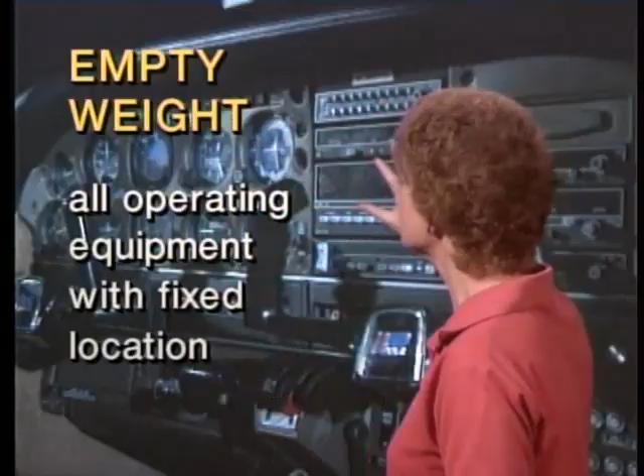The empty weight, the operating weight of the aircraft, includes all operating equipment that has a fixed location in the aircraft and is actually installed. That includes the radio equipment, the avionics, instruments—anything that has a fixed location in the aircraft and is actually installed in it is included in the empty weight of an aircraft.

Now, is fuel included in the empty weight? Only the fuel that you cannot get out of the aircraft, and that is called unusable fuel. The unusable fuel is included in the empty weight simply because you don't have any choice. When you drain the fuel out of the aircraft to weigh it, you can't get that fuel out. It's the fuel in the lines and in certain parts of the tanks where it just won't drain, so that will be included in the empty weight of the aircraft.

Now, is oil included in the empty weight of the aircraft? It depends on when the aircraft was certificated, but the FAA wants you to know that aircraft certificated under current airworthiness standards, FAR 23, do have the oil included as part of the empty weight. That became effective March 1st of 1978. So any aircraft certificated under the current standards do include the oil as part of the empty weight, and you don't have to account for it separately.

Now, the useful load on an aircraft consists of the crew, the fuel, the passengers, and the cargo. The stuff that you, as the pilot, could load on and go somewhere with—passengers and cargo, yourself as the crew, and the fuel you would put on to help you get there. So useful load is crew, fuel, passengers, and cargo.

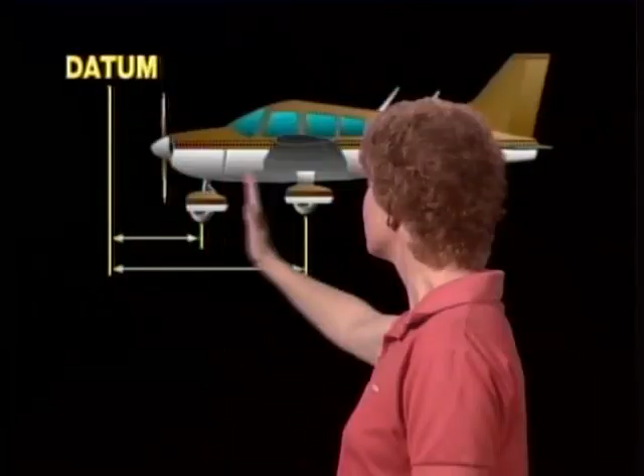The datum line is usually placed in front of the nose, although not always, and the reason is that all the measurements will be positive numbers, which contributes to accuracy. If you had the datum line at the firewall, say, then all the items in front of the datum line would be minus numbers, and you'd have positive numbers to the rear, which would make the calculations more confusing. So by putting the datum line in front of the nose, all these arms will be positive numbers, which helps keep things straighter.

The arm is the horizontal distance that an item is located from the datum line, and usually it will be aft of the datum. If the datum is up in front of the nose, it certainly will be - but it's whatever distance an object is from the datum on the aircraft. The arm's distance is always measured in inches, not feet or anything like that. It's always given in inches.

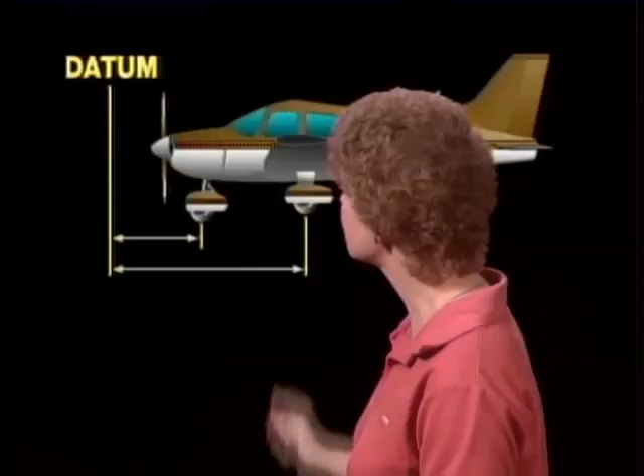Sometimes when working with aircraft information, you'll see the term fuselage station numbers. This identifies the arm distance from the datum, or sometimes from some other point chosen by the manufacturer to measure from. Fuselage station numbers are often used when the manufacturer is identifying the location of parts in the aircraft, to tell you where to find different parts. When working with actual weight and balance, we usually use the term arm for the distance aft of the datum, but when locating parts, you'll very commonly see the term fuselage station number.

Okay, we know the weight of an item, we know its location, the arm, the distance aft of the datum. If you multiply the weight times the arm, what you get is the moment. The moment is basically the leverage effect, the force applied at that particular location, which depends on the weight located there and the arm, the distance from the datum point. If you're given any two of these items - weight, arm, or moment - you can always find the other. Weight times arm equals moment, but you can take the moment and divide it by either the weight or the arm to get the other information.

For example, the FAA may say to you on your mechanics test: you've got a 40-pound generator, and it's applying plus 1,400 inch-pounds.

It's applying a moment of 1,400 to the reference axis. Where is the generator located in the aircraft? What we have in this case is the weight and the moment. Weight times arm equals moment, so all you have to do is turn that around and take the moment and divide it by the weight, and that will give you the arm.

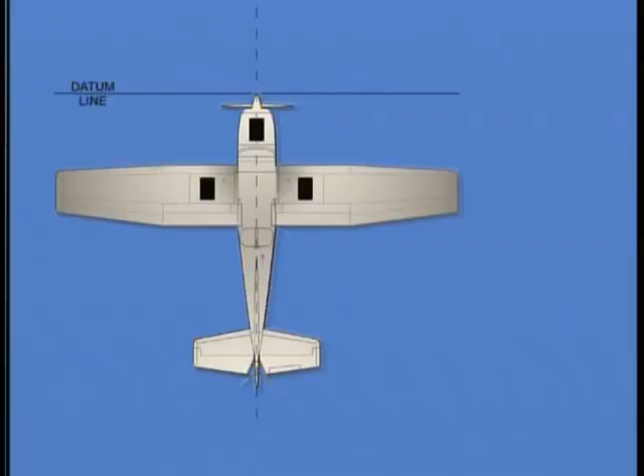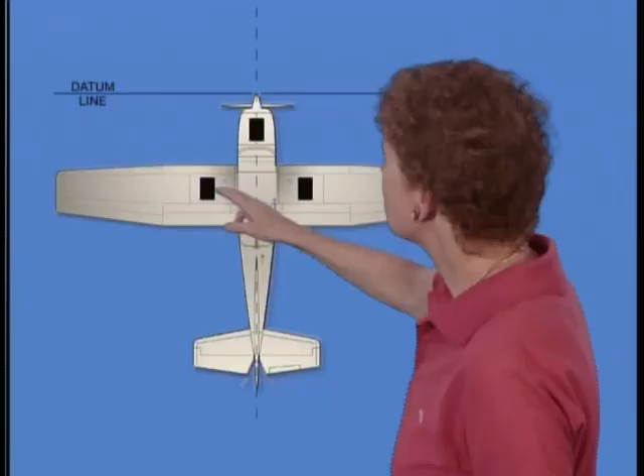Now, when we talk about the location of the center of gravity and its allowable range in small airplanes, we usually base that solely on the distance from the datum or datum line. You may have noticed that the center of gravity seems to fall about 25% of the chord of the wing — in other words, about a quarter of the distance back between the wing's leading edge and trailing edge.

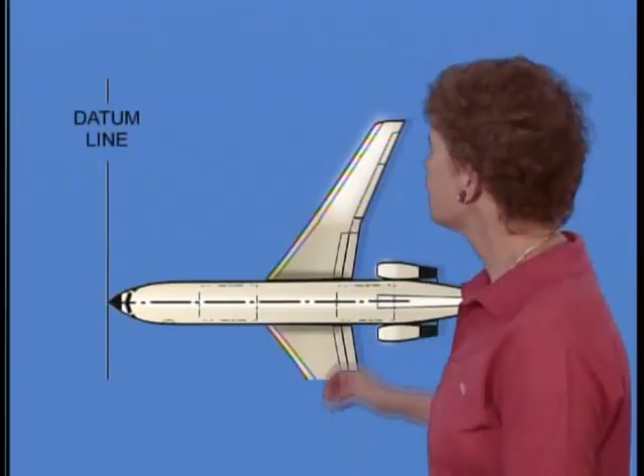Pilots and flight engineers of large airline-sized jets find it more meaningful to know where the center of gravity is in relation to the chord of the wing, not the datum, because it gives them more information about the handling characteristics of the aircraft. The problem is that large jet airliners have swept, tapered wings, so what do you use for the chord as a reference? Do you measure from the leading edge at the root next to the fuselage, or from the tip way out here? As you can see, there's a big difference in chord length depending on where you measure it.

The engineers solved this problem by taking the airplane's swept wing shape and creating an equivalent, more rectangular airfoil shape, then calculating a mean or average aerodynamic chord, which we call MAC — mean aerodynamic chord. This is what the mean aerodynamic chord would look like on this particular wing; it's the chord located somewhere near the middle of the wing. Now that you have a chord to work with, you need to know where the MAC starts in relation to the datum — the location of the leading edge of the mean aerodynamic chord, shortened to LEMAC, and also the location of the trailing edge, called TEMAC.

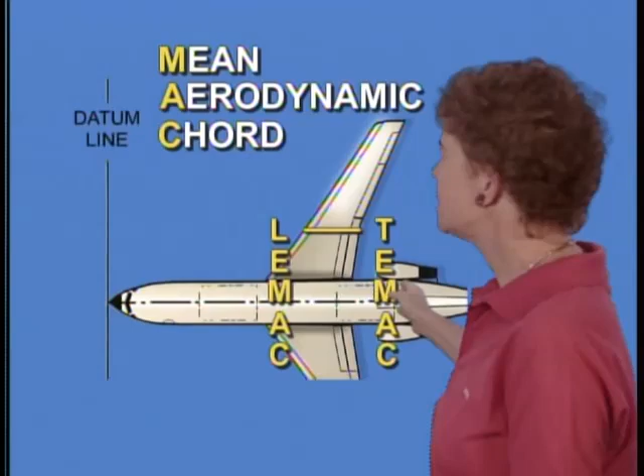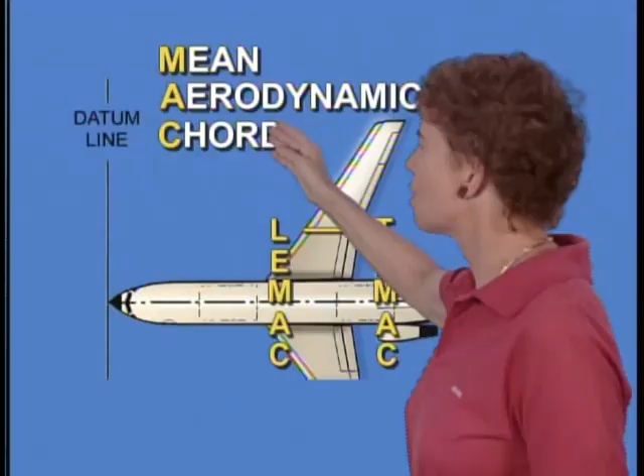So for swept wing aircraft like this, you'll see a LEMAC and a TEMAC, and they're defined by their distance from the datum. Now, when you find the center of gravity as the distance from the datum, you can also say what it is in terms of a percentage of the mean aerodynamic chord, or MAC, and that's exactly what they do with jet transport airplanes.

Just as you measure arms aft from the datum, you measure the CG in distance aft from the LEMAC, and then you express it in percent of MAC. So if you know that the center of gravity is at 24% of MAC, then you also know that the center of gravity is located at a point equal to 24% of the length of MAC measured from the LEMAC.

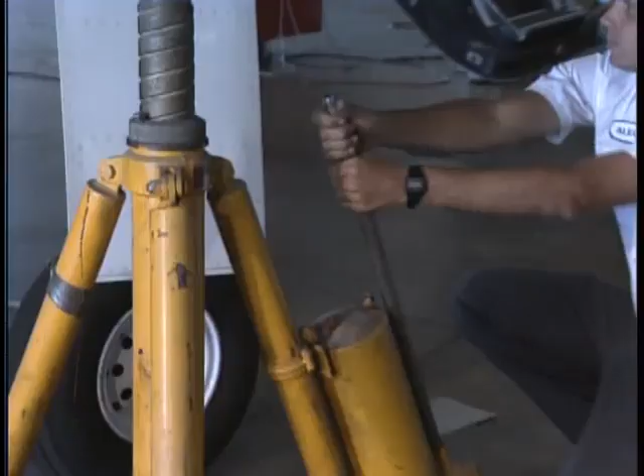Now let's assume you're going to have to weigh an aircraft. Here a mechanic is jacking up an airplane to be able to get scales under the wheels. Maybe the weight and balance documents have been lost. Or maybe you're working with an airplane that's used commercially and you're going to have to actually weigh it in order to know for sure what the weight really is.

First of all, you're going to have to level the aircraft. If you're going to have useful information for determining the center of gravity when you weigh the aircraft, you need to weigh it in a level flight attitude. So how do you know when an aircraft is level for weighing? You go to the type certificate data sheet to get information and specific instructions for that type of aircraft.

Now, some aircraft call for putting a spirit level on a designated structural member or resting it on screws threaded into specific locations. A spirit level is just like a carpenter's level. It has a fluid-filled tube with a bubble in it. In some large aircraft, permanently attached spirit levels are located in an equipment compartment or in a wheel well, and this can give an accuracy as great as 1/8 degree.

Another method is to use a plumb bob that you suspend from a designated point, such as inside the aircraft. It has a target on the floor, and when the plumb bob is directly over the target, the aircraft is level. So the FAA may ask you which method, a plumb bob and grid plate, an inclinometer, or spirit levels, generally yields the highest degree of aircraft leveling accuracy. Well, the highest degree of accuracy is found when using spirit levels.

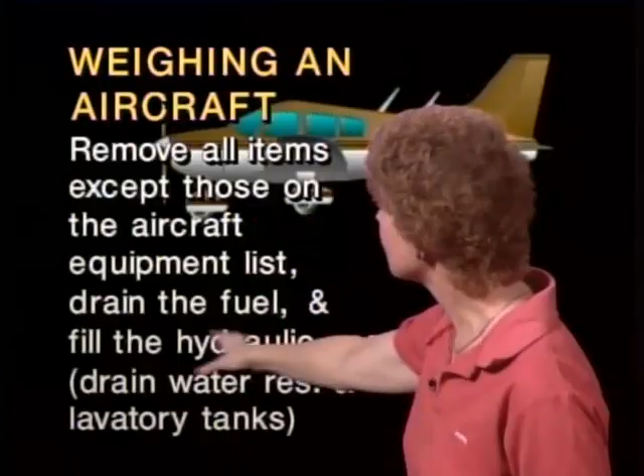Now, before you weigh an aircraft to determine the empty weight of it, you've got to take some things out of it. Remove everything from the aircraft except the items that are on the aircraft equipment list. You also want to drain all of the fuel that you can get out of it. There will be some unusable fuel left in it. And you want to fill the hydraulic reservoir if it has a hydraulic system in the aircraft. If it has any water reservoirs, you drain the water reservoirs. And if you've got a bathroom on board, you drain the lavatory tanks.

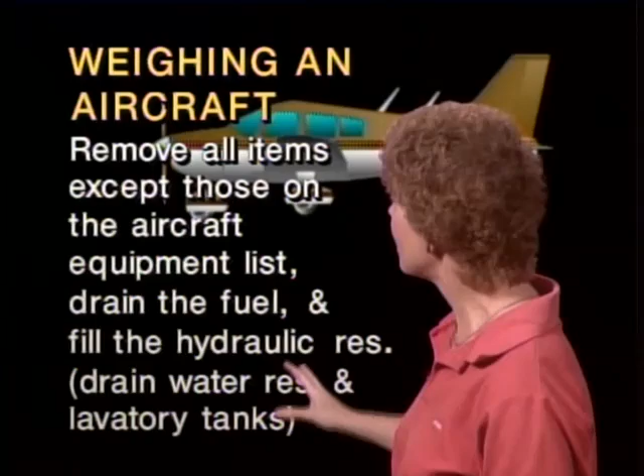But as far as the items in the aircraft, you want to get rid of everything except the ones that are on the aircraft equipment list. If people have got briefcases and all kinds of clipboards and stuff like that, all of that stuff has got to come out, because it will come out from time to time, and you only want, when you're figuring the empty weight, the stuff that's going to be staying in the airplane.

Okay, when you go to find the empty weight and weigh the aircraft, the weighing points that you use, you have to indicate exactly what weighing points you used on the aircraft weighing form, because the arm values, the distances from the datum point that you are using when you weigh it, are based on the locations of the weighing points. So you've got to put them down on the form.

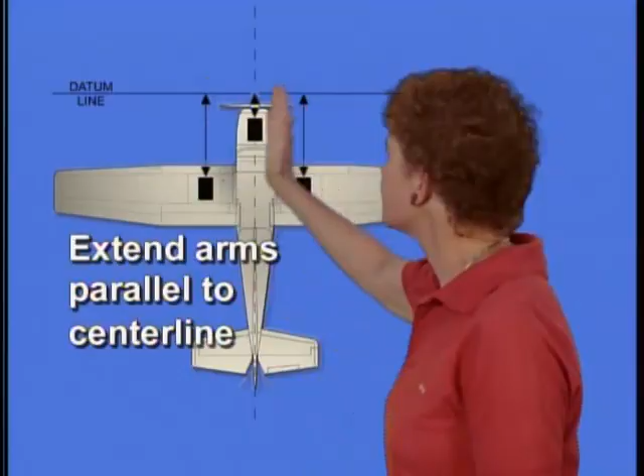After locating the weighing points, when you're measuring the arms from the datum, make sure you're measuring parallel to the center line of the airplane. You do not want to introduce error by having your tape at an angle. So if you're weighing an airplane to obtain the CG, always extend the arms from the weighing points parallel to the center line of the airplane.

The empty weight of an aircraft is determined by subtracting the tare weight from the scale reading. The tare weight consists of things like chocks or supports to hold the tail up to get a level flight attitude—anything that sits on the scale, so the scale reads its weight, but it's not part of the airplane. Chocks to keep the airplane from rolling off the scales, supports to hold the plane in the proper level flight attitude—those are tare weight, and you subtract them from the scale reading because what you're after is the net weight of just the aircraft itself.

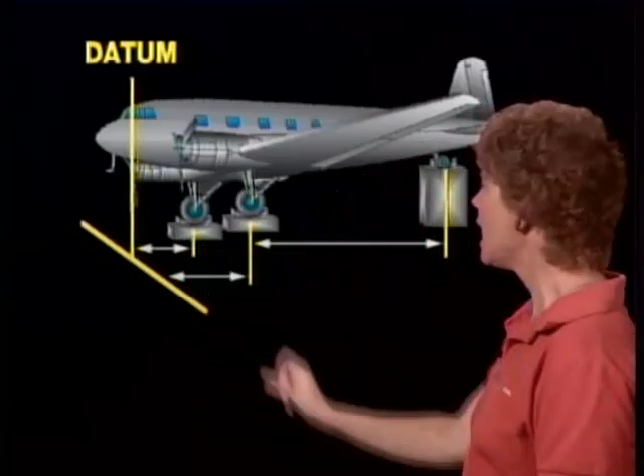Then you add the weights at each weighing point. In this case we've got 3 weighing points: a left main gear, a right main gear, and the tail gear, and we're weighing the airplane at each of those points. So we take the scale readings, subtract the tare weights—the chocks and the tail support—and then add those 3 net readings together to get the empty weight of the aircraft.

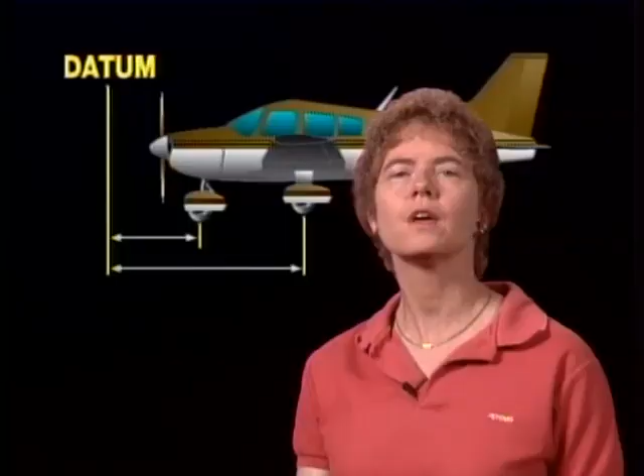The FAA will give you a number of problems working with empty weight and center of gravity, so let's talk about one of them. First, they'll say you're going to be weighing this particular aircraft. They'll give you all kinds of different aircraft and won't tell you exactly what airplane you're working with, but it doesn't really matter because it's just a process of going through the numbers.

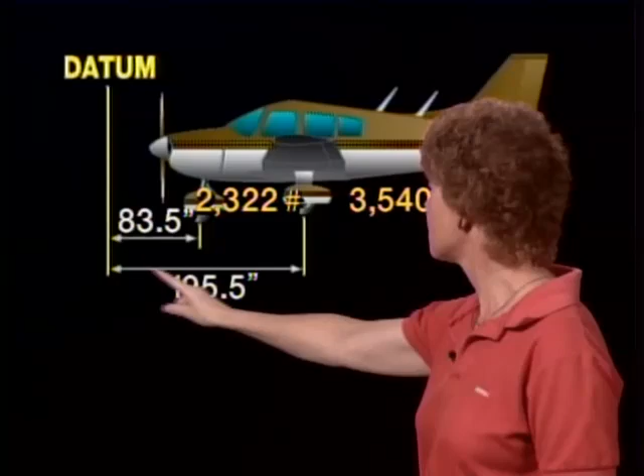What they'll say is that when you weigh the aircraft, the net combined weight at the main gears is 3,540 pounds, and the arm of the main gears is 195.5 inches, meaning that from the datum line on the airplane to the main gears is 195.5 inches. That's the arm, the distance the main gears are behind the datum line.

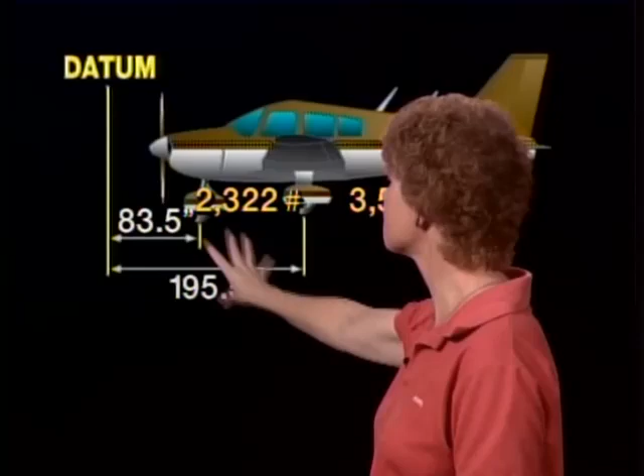They say the net weight at the nose gear is 2,322 pounds, and the arm of the nose gear is 83.5 inches, meaning it's 83.5 inches aft of the datum line. They tell you the datum line is forward of the nose of the aircraft. That makes everything easy—we don't have to worry about exactly where it is. All we know is these are all going to be plus numbers, and it's going to be easy to work with. Now, to figure out the center of gravity, we work with the formula weight times arm equals moment.

The first thing we do with that formula is set up a table with 4 columns. In the left column we list the weight points we're working with—the various gears. Then we list the weights at each location, then the arms, the distance aft of the datum line, and then we put the moments in: weight times arm equals moment. They gave us the weights and the arms, so we multiply to get the moment.

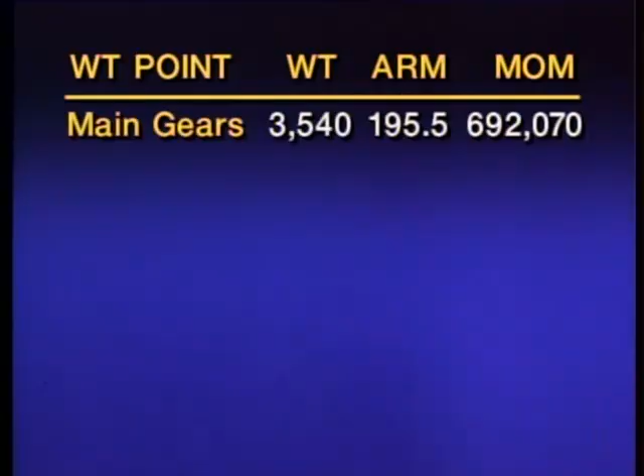The first thing we know is the weight at the main gears, which was 3,540 pounds. The arm, we were told, was 195.5 inches. Let me be your calculator: 3,540 pounds times 195.5 inches gives us a moment of 692,070. The moment is the force exerted in that particular location.

The next thing we list is the nose gear. The weight was 2,322 pounds at an arm of 83.5 inches. Weight times arm equals moment, and the moment for the nose gear is 193,887. Now the next thing we do is total the weights and total the moments.

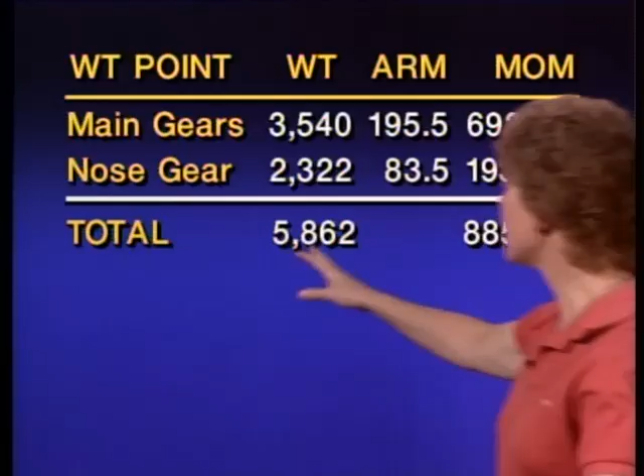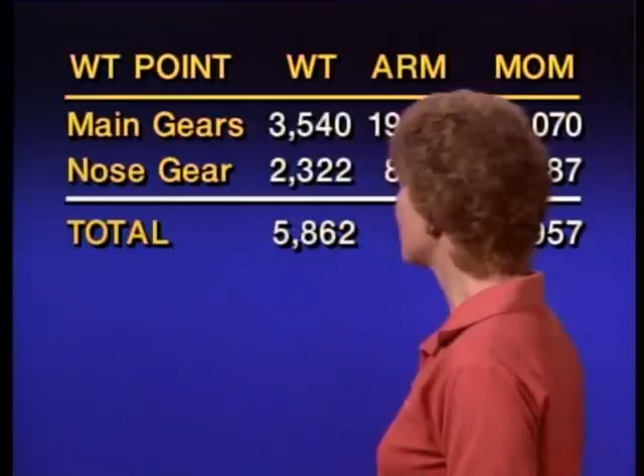You don't total the arms—there's no such thing as a total arm. There is an average arm, which is the same as the center of gravity, but there's no such thing as a total arm. So when you total the weights, the total comes up to 5,862 pounds.

When you total the moments, the total moments come up to 885,957. What we really want, though, is the center of gravity. To get the center of gravity, if you know the moment and you know the weight, all you have to do is divide. Total moment divided by total weight will give you the average arm, or the center of gravity.

The total moments were 885,957. The total weight was 5,862 pounds. And when you divide that, the center of gravity, the average arm, is 151.1 inches. That is the center of gravity, or the average arm, the average location of the weight, if you will, on the aircraft.

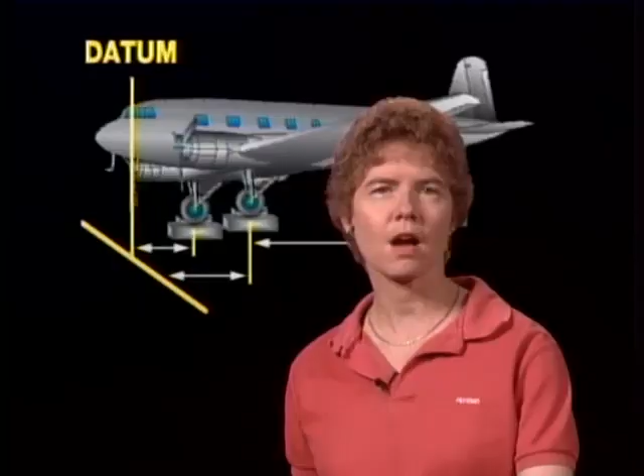The FAA will give you another question, and they will ask you to determine the empty weight center of gravity, but they put some extra stuff on board the aircraft, some of which should be there and some of which has to be subtracted in order to get the empty weight and the center of gravity of the aircraft. Here you've got an aircraft.

The datum is forward of the main gear. The distance from the tail gear to the main gear is 360.26 inches. The distance from the datum line to the main gear is 30.24 inches. On the right main gear, we have weight on the scale of 9,980 pounds. On the left main gear, we've got a weight on it of 9,770 pounds on that scale. And on the scale at the tail, we're showing a weight of 1,970 pounds.

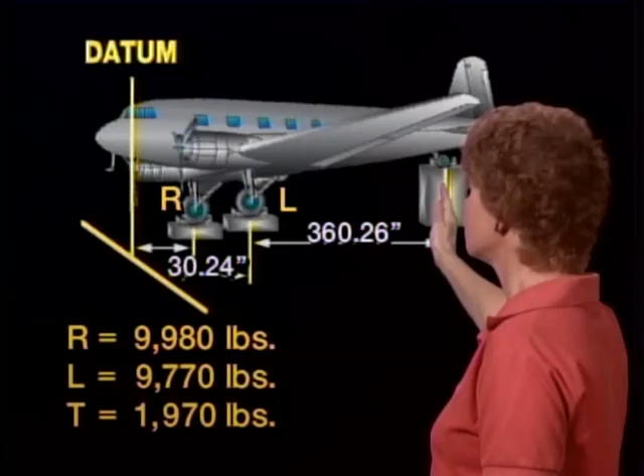Now, as we look at this diagram, what they have given us is the distance from the datum line to the main gear, and then from the main gear back to the tail. In order to get the datum to the tail, what we have to do is add the distance from the datum to the main gear to the distance from the main gear back to the tail gear. So we add 360.26 and the 30.24, and that gives the distance all the way from the datum line back to the tail gear on the aircraft. That comes up to 390.5, and we're going to plug that into our table in a little bit.

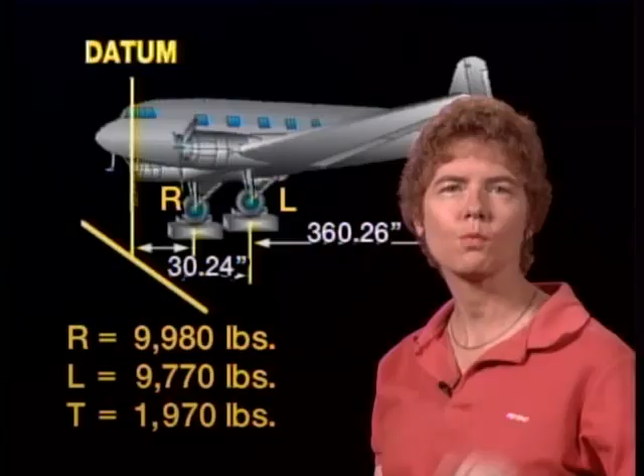But the FAA also says we've got some additional items in the aircraft when we weigh it. First of all, a lavatory water tank. The weight in that tank is 34 pounds, and the location of the tank is plus 352, meaning 352 inches aft of the datum line.

We also have hydraulic fluid. There are 22 pounds of hydraulic fluid, and it's located at -8. That means it is in front of the datum line, located at -8 inches.

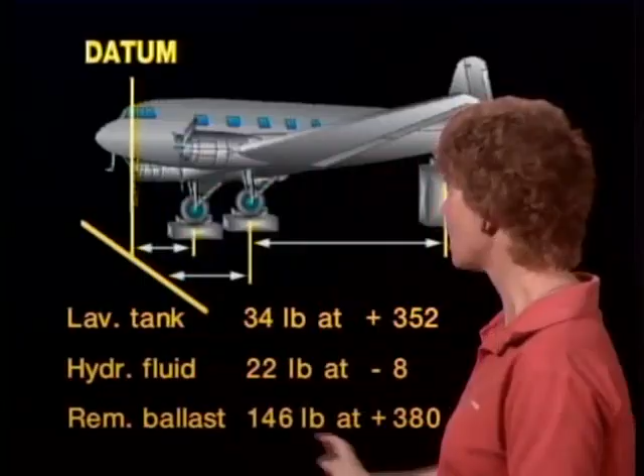We also have some removable ballast in the aircraft. It can be put in or taken out - it's removable, not fixed - and that is 146 pounds, located at plus 380, meaning 380 inches aft of the datum line.

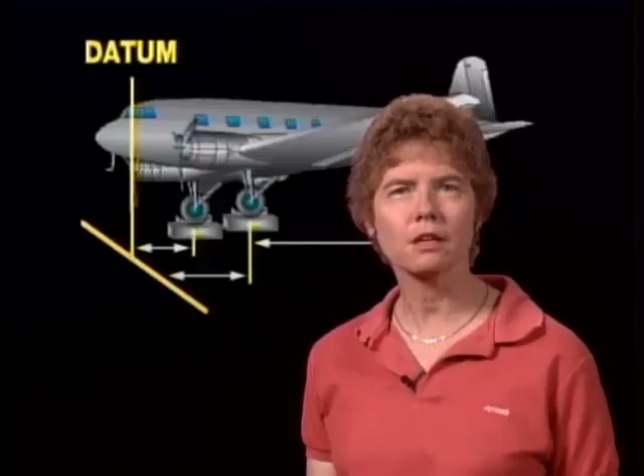Now, when you're working a weight and balance question, the result of a weight being added or removed and its location relative to the datum line determines whether the moment is going to have a plus or a minus sign in front of it. For instance, if a balance computation requires that an item located aft of datum be removed, you've got a minus weight because you're getting rid of the weight, but you have a plus arm because the item is aft of the datum, making it a positive number. When you multiply a minus number by a plus number, you get a minus number. So if you're removing a weight, the weight would be entered as a minus. The arm aft of the datum would be a plus arm, but the result of multiplying those would be a minus moment, because just like you're getting rid of the weight out of the aircraft, if you remove an item, you are also getting rid of the leverage effect of it, which is what the moment is, and therefore you would have a minus moment when you go through the calculations.

So let's set up our table again: weight point or item, weight, arm, and moment. Weight times arm will give us the moment. The first weight point is the right gear, and on the right gear we had a weight of 9,980 pounds. The arm they gave us was 30.24 inches, and when you multiply, the moment is 301,795.2. The second item is the left gear.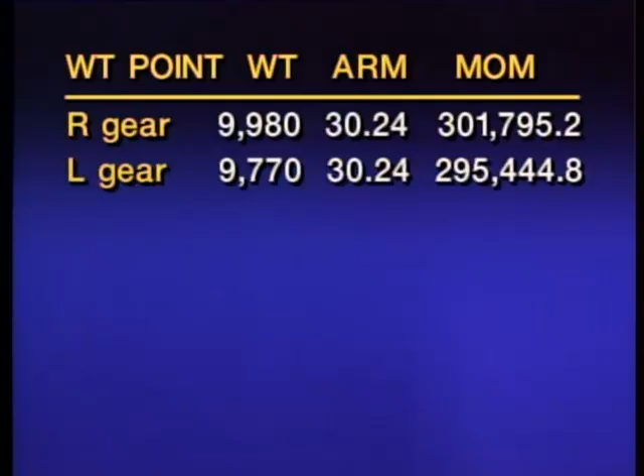The weight they gave us on the left gear was 9,770 pounds. The arm is the same as for the right gear—they're the same distance aft of datum, 30.24. Multiply weight times arm, and the moment is

295,444.8. Then we've got the tail gear. The tail gear, we were told the weight there is 1,970 pounds. The arm of the tail gear is 390.50, because we took the distance from the datum line to the main gear and then the distance from the main gear back to the tail and added them together to get that 390.50. Multiply, and the moment is

769,285. Now, as far as the hydraulic fluid is concerned, hydraulic fluid belongs in the airplane. It is part of the empty weight. So we don't do anything at all as far as the hydraulic fluid is concerned. It was included when the airplane was weighed, and it should be included when the airplane is weighed.

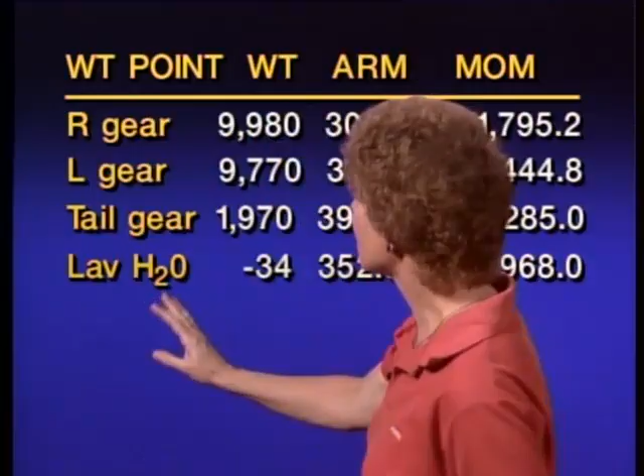But what we do have to remove is the lavatory water. We got to get rid of that H2O, the lavatory water, because it doesn't belong. There was 34 pounds of it, and we're getting rid of it. So under weight, we put a minus 34. The location of the lavatory water tank is 352 inches aft of datum. It's aft of datum, so it's a positive number. We put it in there as 352.

Weight times arm equals moment. We get a moment of minus 11,968, and it's a minus moment for the lavatory water because we're getting rid of the weight, and when you get rid of the weight, you get rid of the effect of that weight, and that's what the moment is.

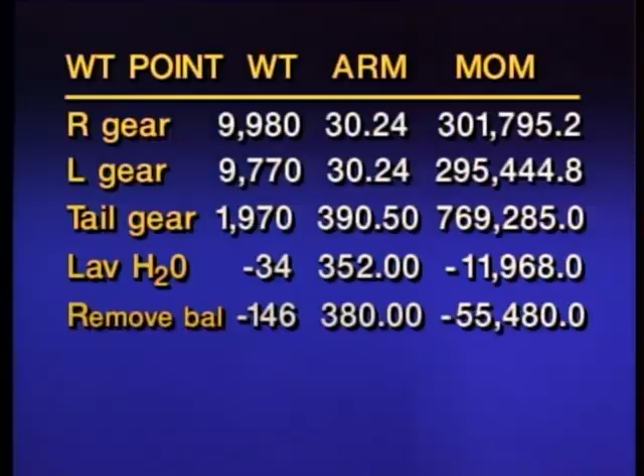We also have to get rid of the removable ballast. Because it is removable, it's not included in the empty weight of the aircraft, and therefore we put in a minus 146 pounds for the removable ballast.

The arm of it is 380 inches. Weight times arm equals moment. The moment for the removable ballast is a minus 55,480. And then what we do is we total the weights and we total the moments.

The total weights are 21,540 pounds. The total moments are 1,299,077. Okay, we've got the weight and we've got the moment, but what we really want to have is the center of gravity.

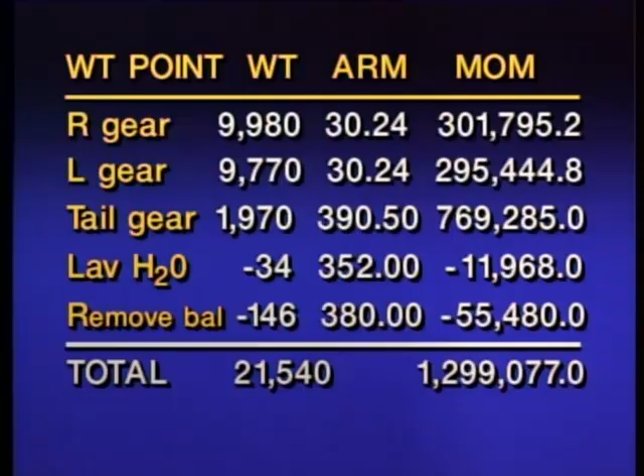Center of gravity: take the total moment, divide it by the total weight, and that gives you the average location of the weight, the average arm or center of gravity. And when you divide the total moment by the total weight, you get a center of gravity in this particular case of 60.31 inches.

Remember, hydraulic fluid belongs in the airplane. Do not get rid of it. But water in a lavatory tank or removable ballast are not part of the empty weight and do have to be subtracted out. Okay, they'll give you another question that looks like this.

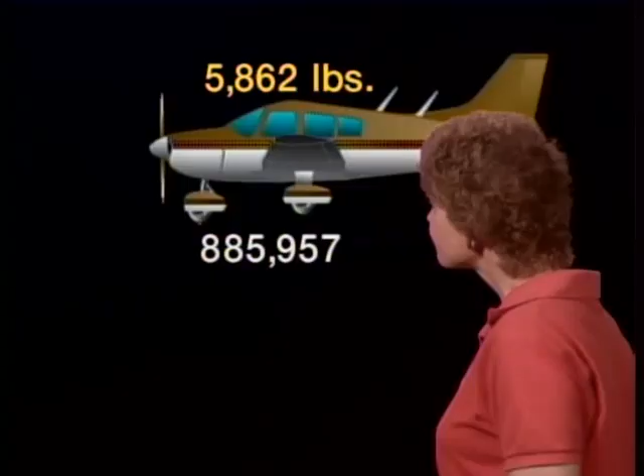They'll say to you, you've got an airplane, and rather than giving you the weights on each of the wheels, they'll say to you that the total empty weight as weighed is 5,862 pounds, and the total moment of the airplane with the empty weight is 885,957. On board the aircraft, when it was weighed, are a couple of additional items.

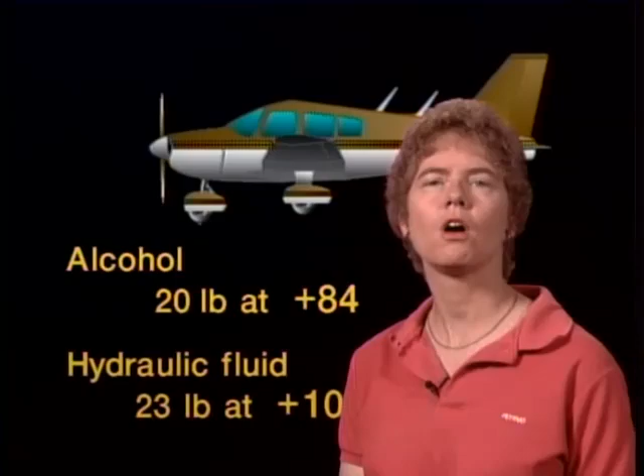First of all, alcohol: 20 pounds of alcohol at a location of plus 84 inches. Also hydraulic fluid: 23 pounds on board at a location of plus 101 inches. The pluses simply mean that it's located aft of the datum line as opposed to in front of it. And the question is, what is the empty weight center of gravity of the aircraft?

So we set up the table: the weight point or items, the weight, the arm, the moment. Weight times arm equals moment. The first thing we put in there is the empty weight of the aircraft itself. The weight is 5,862 pounds. The moment is 885,957. And the arm of the airplane at that point is

151.14. Now, the arm was not given to us. We calculated it because if you have the moment and you have the weight, you can divide and come up with the arm. We did it just to fill in the table.

Okay, alcohol. Is alcohol included in the empty weight of the aircraft? No, it's not. So the alcohol has to come off. There were 20 pounds of it, so under weight you put a minus 20. It was located at 84 inches, so under arm you put 84. Weight times arm equals moment, and you get a minus 1,680 for the moment.

You're removing the alcohol, so you remove both the weight of the alcohol and also the influence, the moment of it, from the calculations.

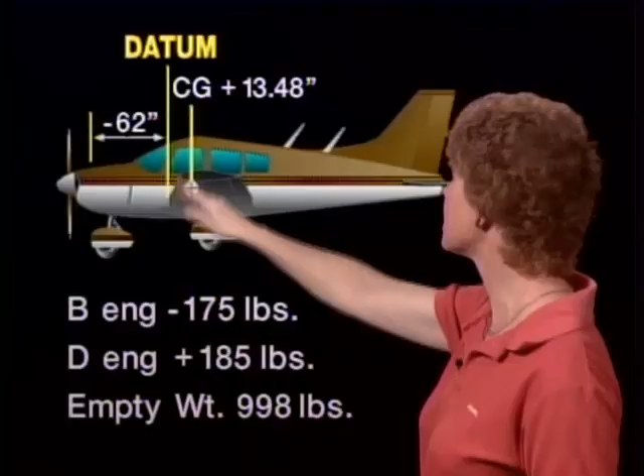The datum line is located right about here, roughly in this diagram, the leading edge of the wing, because of the way the numbers, the stations, are given to you. They say to you that the station of the engine is a minus 62 inches. Well, if it's a minus number, it has to be in front of the datum line, which means the datum line needs to be about the leading edge of the wing and the engine's out in front of it.

And they also tell you that the previous empty weight center of gravity is 13.48 inches and that the previous empty weight, this is before the engine change, was 998 pounds, and what they want to know is what is the new empty weight center of gravity when you get done with this engine change.

So you set up the table, item, weight, arm, and moment, and then start filling in the numbers. The first thing is the original empty weight of the aircraft. It weighed 998 pounds. The arm was 13.48 inches. Weight times arm equals moment, and the original moment was 13,453.04. Now you're going to take out the B model engine.

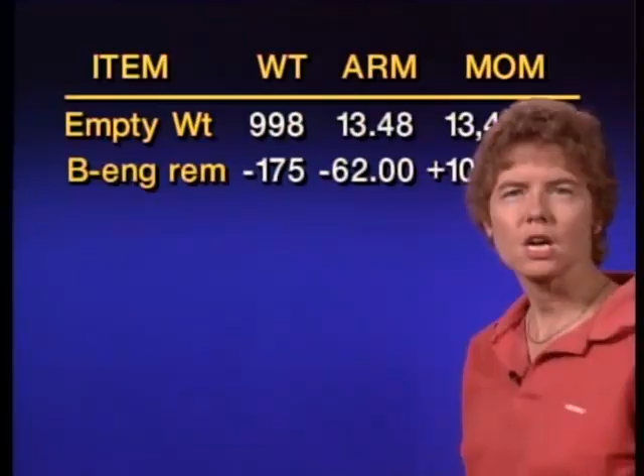So under weight you put a minus 175 pounds because you're getting rid of it. Now the arm of that B model engine was a minus 62 inches. That minus is because it's in front of the datum line. And that's fine, no problem. Put it in as a minus arm.

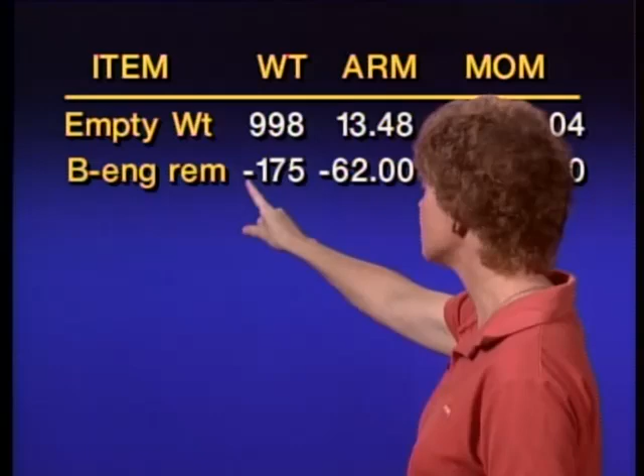But the thing that happens is when you multiply a minus weight times a minus arm, this time, instead of getting a minus moment, you get a plus moment. And you get a plus moment of 10,850 because a minus number multiplied by a minus number will give you a positive number.

Okay, you took the B model engine out. Now you put the D model engine in. You install the D model engine. It weighs 185 pounds, so you put under weight a plus 185. The location of it is an arm of minus 62 inches, so under arm you put a minus 62.

Weight times arm equals moment, and you get a moment of 11,470, and that is a minus moment because you had a minus arm. In this case, it's not a minus weight that makes it a minus moment, but the arm has a minus number, a negative number, and therefore you end up with a negative number for the moment.

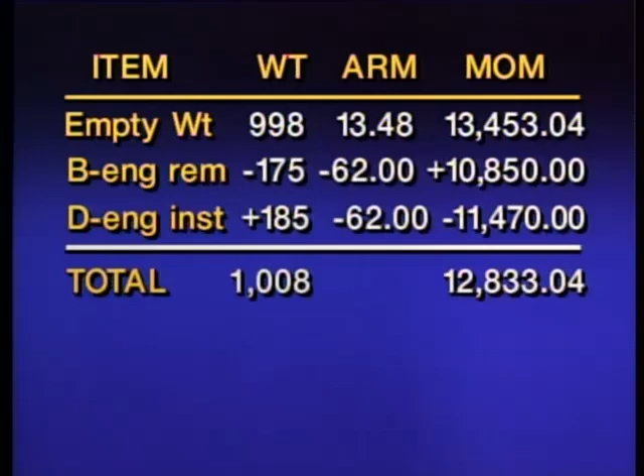And then you simply total the weight and total the moment. The total weight is 1,008 pounds. The total moment is 12,833.04.

And in order to get the new center of gravity, we simply use our formula of dividing the total moment by the total weight to get the center of gravity. And when you divide the total moment, 12,833.04, by the weight of 1,008 pounds, the new center of gravity for the empty aircraft after the engine change is 12.73 inches.

Okay, the FAA will ask you another question where they don't change the engine, but they do a lot of other changes on the aircraft. And what they say is the original empty weight is 2,886 pounds.

The original moment of the empty aircraft is 101,673.78. What you do is you take two passenger seats out. The passenger seats weigh 15 pounds each, and they're located at plus 71, meaning 71 inches aft of datum. You install a cabinet that weighs 97 pounds, located at 71 inches. You install a seat and a safety belt that weighs 20 pounds, put it in at 71 inches. And you install radio equipment that weighs 30 pounds, located at 94 inches. The question is, what is the new empty weight center of gravity?

You simply set up the table: item, weight, arm, and moment. The empty weight of the aircraft is 2,886 pounds. The moment was given as 101,673.78. To get the original arm, the center of gravity, you divide the moment by the weight, and you get the arm on the empty weight of the aircraft. It was 35.23 inches to begin with.

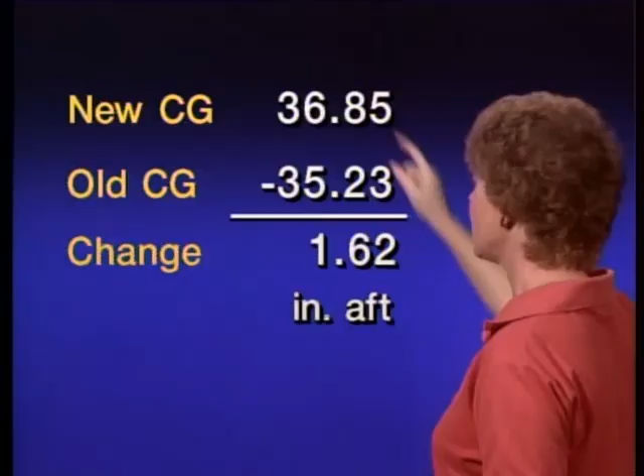Most problems like this will stop right there, but not all of them. In some cases, the FAA will ask what is the change from the old center of gravity, how much has it moved, and which direction. The new center of gravity is 36.85 inches. The old center of gravity was 35.23 inches. When you subtract the two, the difference, the change, is...

1.62 inches. The new center of gravity is further aft of datum than the old one because it's a bigger number—36 inches and some instead of 35 and some. So the center of gravity has moved rearward, toward the aft position in the aircraft when you made the change. The new center of gravity is 1.62 inches aft of the old center of gravity.

Now let's talk about the theory of weight and balance. It's the same theory as a lever in balance, in equilibrium, resting on a fulcrum in a level position. This, in essence, is what we want the airplane to do. The concept we're working with is that the center of gravity is the same as the fulcrum—it's the balance point here on our lever.

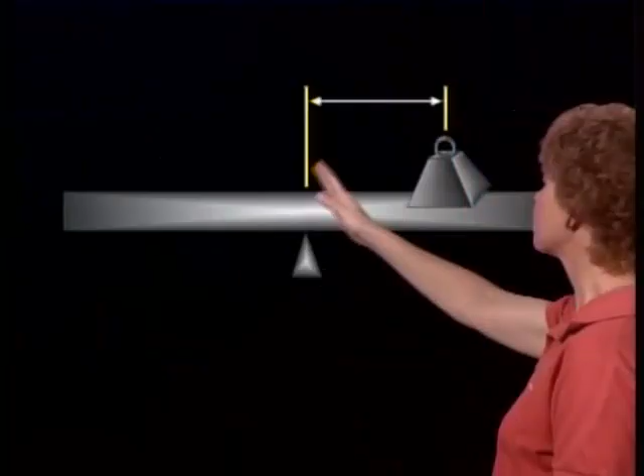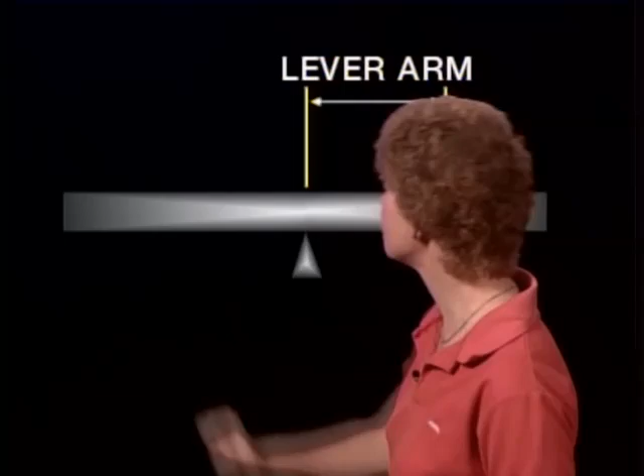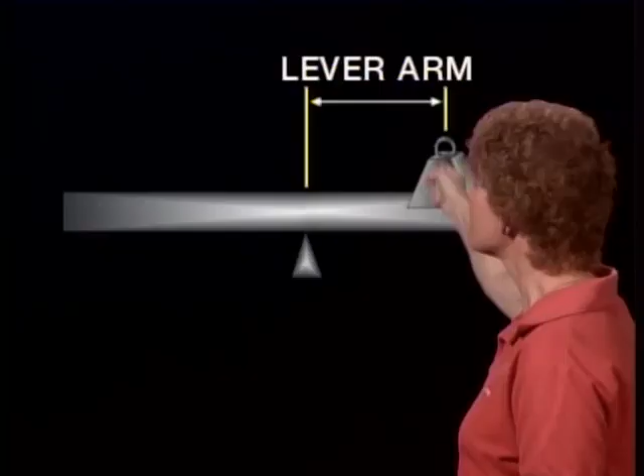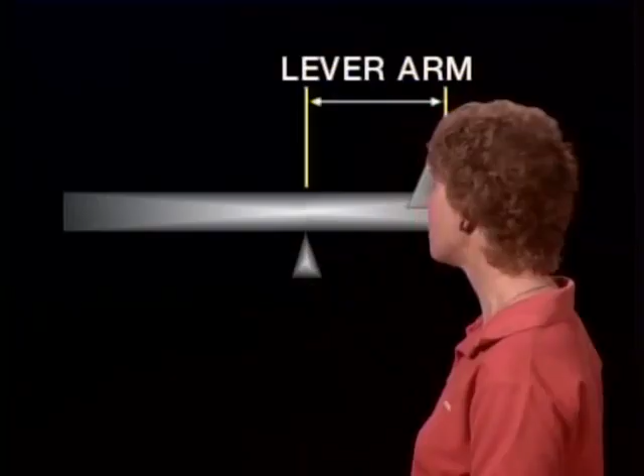Now let's talk about the concept of lever arm. The distance that any object is from that fulcrum is called the lever arm. What we've been working with in general has been just the arm, the distance something is from the datum line, which has been up at the nose of the airplane. But assume you put a fulcrum at the center of gravity of the aircraft and measured from that instead of from the datum line. What you'd have is a lever arm, because this is the distance behind or in front of the balance point, the point the aircraft or lever is rotating about. The center of gravity is what the aircraft rotates about, so if you measure from there instead of the datum line, you get the lever arm of a particular item.

The FAA will give you some questions that require you to work with that. For instance, they will say you have put 2 boxes in an airplane. We're going to use this lever to illustrate it because it works a little bit better.

One box weighs 10 pounds and is located 4 feet aft of the center of gravity. Another box weighs 5 pounds and is located 2 feet aft of the center of gravity. Now you've got a 20-pound box that you're going to put in front of the center of gravity. The issue is how far forward of the center of gravity, the balance point, the fulcrum, can that 20-pound box be placed so that the center of gravity does not change.

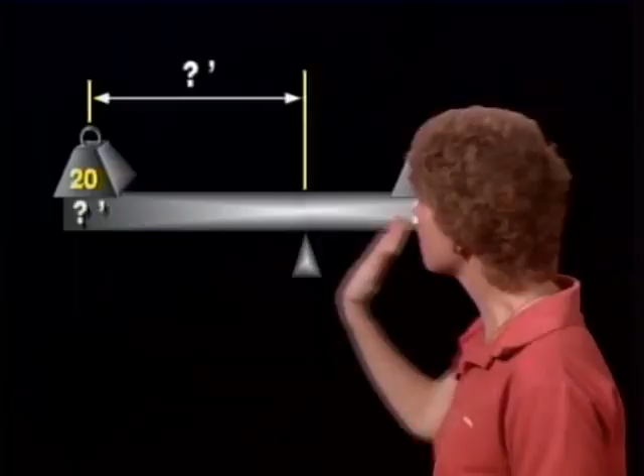In other words, you started off with a lever in balance, an airplane in balance. You added 2 boxes behind the center of gravity. You're going to put a third one in front of it, and the issue is how far forward of the center of gravity that box needs to be.

Okay, simply set up a table. In this particular case, when you set up the table, the columns are item, weight, lever arm, and moment. Lever arm, because we're not measuring from the datum line - we don't even know where that is in this problem. What we're doing is measuring from the center of gravity, which is the same as that fulcrum we looked at.

So we start adding the items in. First, we've got box 1, which weighed 10 pounds, had a lever arm of 4 feet, and 10 times 4 gives us a moment of 40. Then we add in box 2, which weighed 5 pounds, had a lever arm of 2 feet, and that gives us a moment of 10.

And then you total the moments. We're not really interested in the weights here - all we're interested in is how much force we have to counterbalance. The total moments added aft of the CG, aft of the fulcrum, are moments of 50. Now, in order for this aircraft to be in balance, when we put the third box in, what we have to do is balance those moments.

So we're going to have minus 50 moments. That means an effect of 50 forward of the center of gravity. We know we're going to put 20 pounds forward, but what we don't know is how far forward we have to put it.

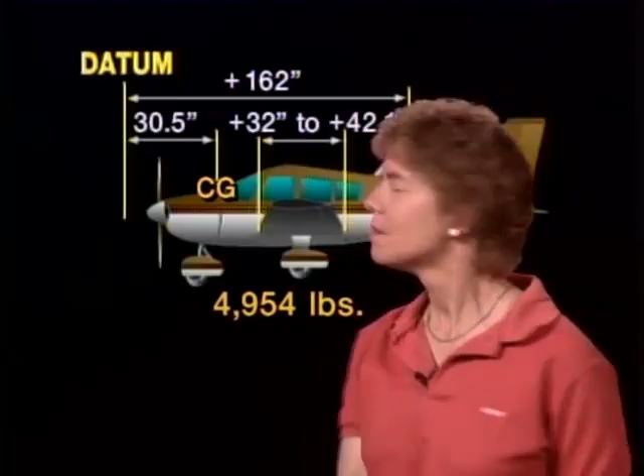You can see already that you've got a problem, because the center of gravity as the aircraft is loaded is forward of the allowable center of gravity range. It's outside the range to the forward of the aircraft.

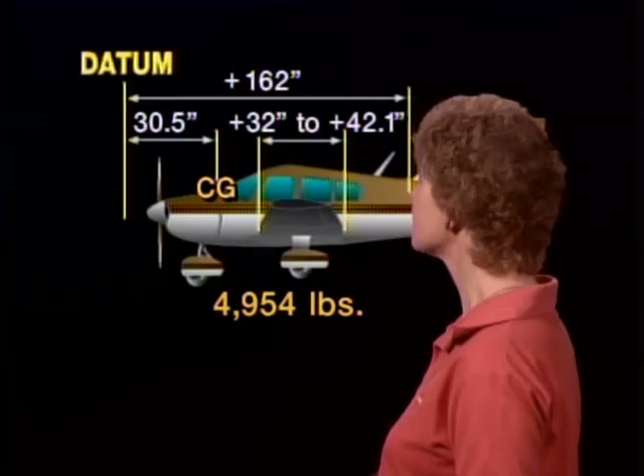Now, to get the center of gravity back in range, what you're going to do is put some ballast in the back of the aircraft, and the arm on the ballast is 162 inches, meaning 162 inches aft of the datum line. What they're going to say to you is, after giving you these numbers, how much weight of ballast do you put at this location in order to move the center of gravity within the allowable range?

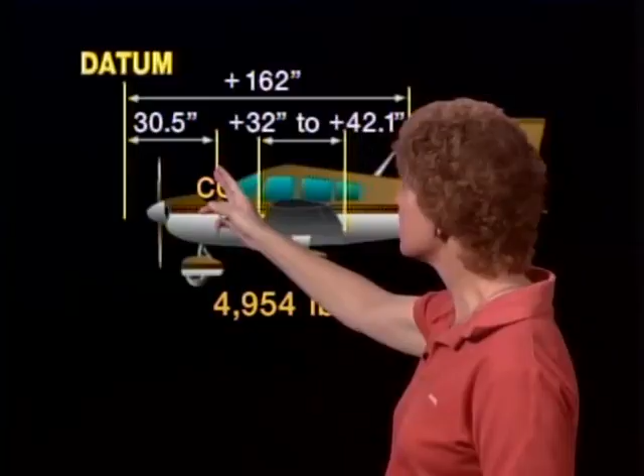That means you need to have the center of gravity move from 30.5 inches to exactly 32 inches, because when they ask you what is the minimum weight you have to put in the ballast location, they're asking what is the minimum weight needed to bring the CG to where it's exactly legal.

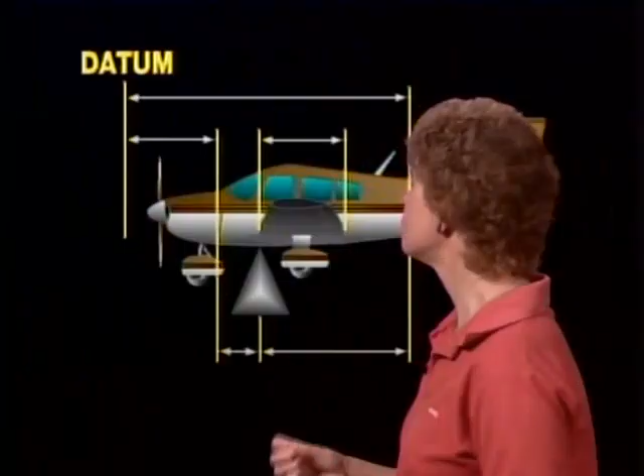Not in the center of the range, but to where it's exactly legal, a position of 32 inches. The way you think about this is that the ballast added causes a moment change in the whole aircraft equal to the moment change caused by adding that weight. So you put a fulcrum where you want the airplane to be in balance when you're done, which in this case is the forward limit of the allowable center of gravity range, and from that fulcrum you compute lever arms for the items you're working with.

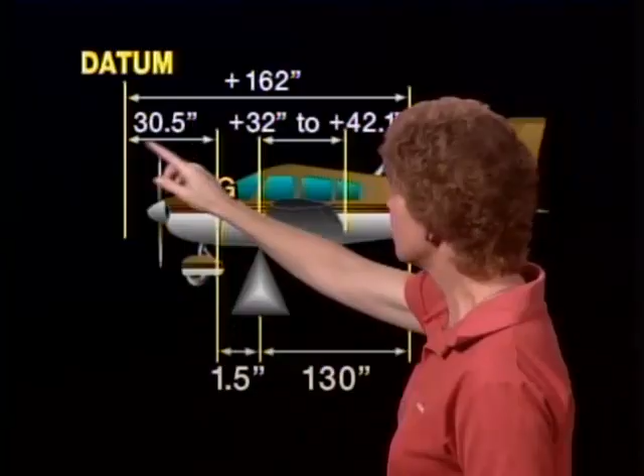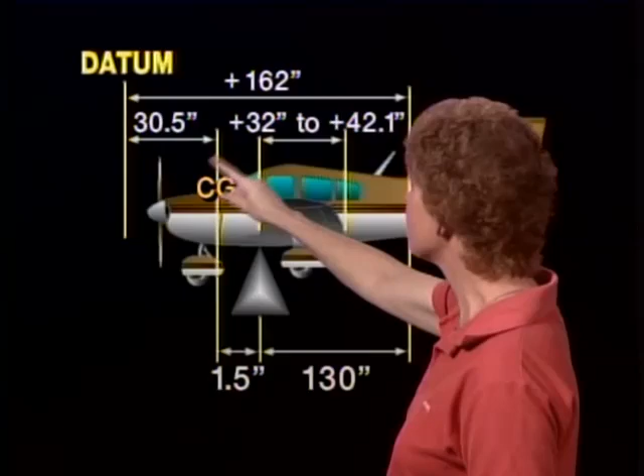The center of gravity is 30.5 inches aft of datum. The forward limit of the center of gravity range is 32 inches aft of datum. From 32 to 30.5, the difference is 1.5 inches. So we've got a lever arm here of 1.5 inches that we have to move the center of gravity.

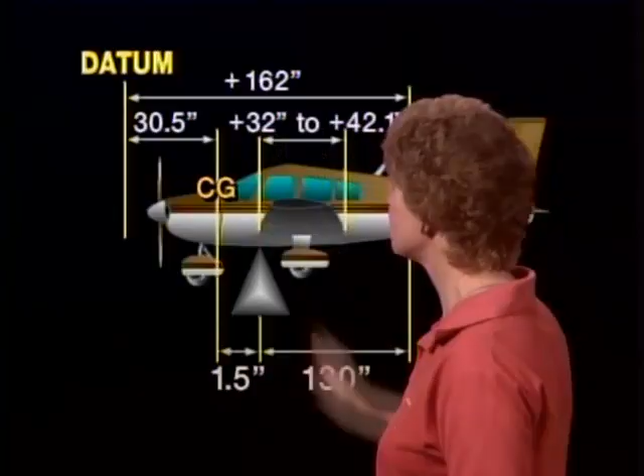Now, from where we want the airplane to be in balance when we're done, which is 32 inches, back to the location of the ballast we're going to put in the plane, is a distance of 130 inches. We get that by taking the arm of the ballast, which is 162 inches aft of the datum line, and subtracting from that the forward location of the foremost limit of the center of gravity, which is 32 inches. 162 minus 32 gives you a lever arm of 130 inches for the ballast weight we're going to put in there.

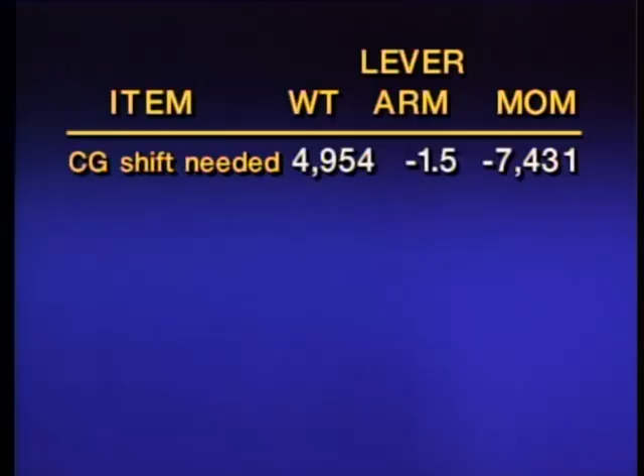Then all we have to do is work through our same table, but using the lever arm rather than the original arm, the distance from the datum line. So in our table, first we put the CG shift that's needed. The weight of the aircraft is 4,954 pounds, that goes under weight. The lever arm is minus 1.5 inches because the original center of gravity is 1.5 inches in front of where it's allowed to be.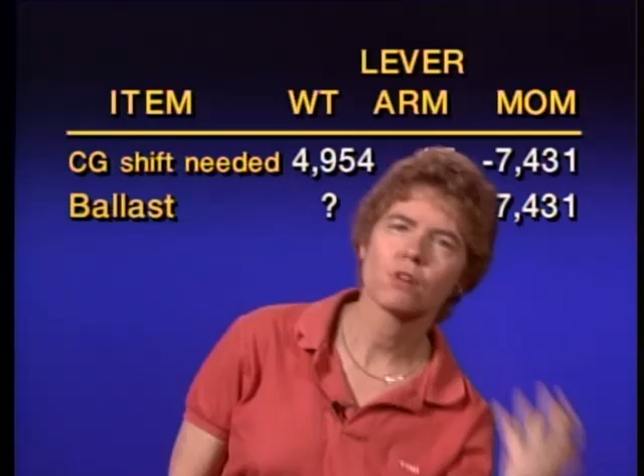Weight times lever arm gives us the moment, and that gives us a minus moment of 7,431. What we've got here are moments of 7,431 in front of the allowable CG limit that we have to counteract, that we have to counterbalance. So to balance those moments, we need positive moments of the same amount, 7,431.

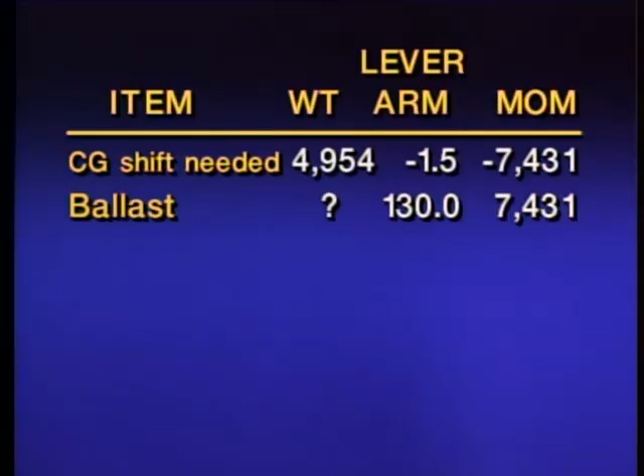We've got the positive moments of 7,431 that we need, and we know the lever arm on the ballast is 130 inches. All we have to do then is divide, this time dividing in order to come up with the weight. We take the moment, 7,431, and divide it by the arm, which is 130 inches, and the ballast weight we have to put in the aircraft is 57.16 pounds.

Remember, if you've got any two numbers, you can always get the third in our weight and balance formula of weight times arm equals moment. In this case we got the moment and the arm, and it's the weight we need to find out. We need 57.16 pounds of ballast in order to bring the center of gravity back to the forward limit of the allowable center of gravity range.

Now let's talk some more about that center of gravity range, that empty weight center of gravity range. The empty weight center of gravity range is the allowable range of travel within the center of gravity limits. If the empty weight CG of an airplane falls within these limits, it's not necessary to calculate extremes, because as long as the empty weight CG falls within the empty weight CG range, it's not possible to load the aircraft so it gets out of CG limits, as long as standard loading arrangements are used.

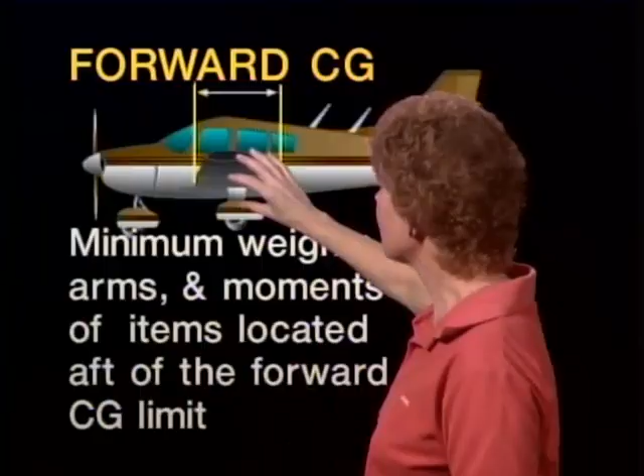If you're doing a forward center of gravity check, what you want to know is: is the aircraft going to be out of the center of gravity limits, the loaded center of gravity limits, to the fore? In order to get the extreme condition on that, what you do is everything that's located aft of the forward CG limit, you take the FAA designated minimums for. You take the minimum weights, minimum arms and moments of any items that are located aft of to the rear of the forward center of gravity limit in order to run a loaded forward center of gravity check.

Because what you want to see is, if the things that are located behind this forward limit are at their very minimum values, will the center of gravity of the aircraft be out of the limits forward, or will it still be within limits? Then you make a rearward loaded center of gravity check.

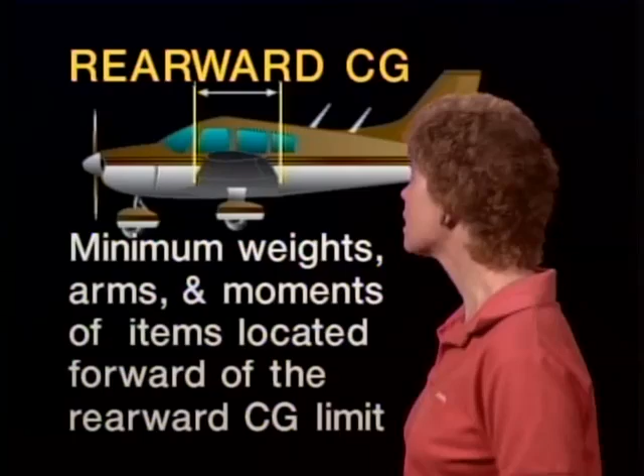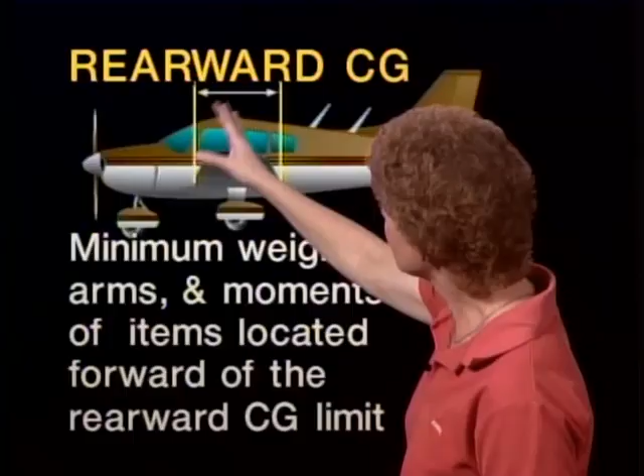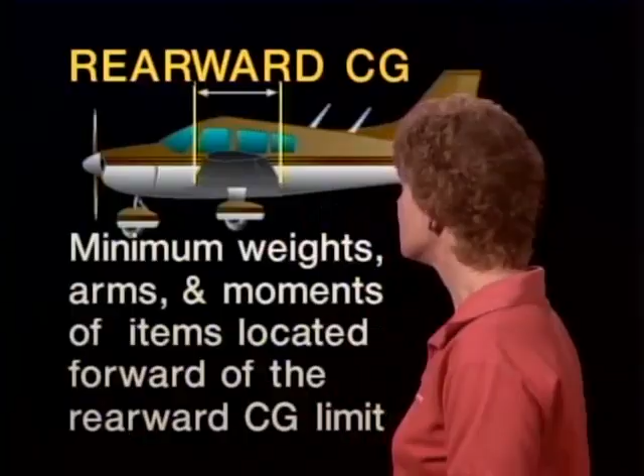Now, if you're doing a rearward loaded center of gravity check, what you want to do is take for your values the minimum weights, arms, and moments of anything that is located forward of the rearward CG limit. Because on a rearward check, what you're trying to figure out is: anything that is located in front of the rearward limit, if it's at its minimum value, will the aircraft end up out of center of gravity to the rear in the loaded condition as opposed to the empty weight condition. And these extreme checks sometimes have to be done depending on where the empty weight center of gravity falls.

Now, if you're doing adverse loading checks like these, under what condition would you do them? Well, if you're conducting an adverse loading check, you want to make sure that you're using a load that is at or below the maximum gross weight of the aircraft. It makes no sense to do adverse loading checks using loads that exceed the aircraft's maximum gross weight. You'd learn nothing about the extreme forward or rearward loaded CG if the aircraft is not within the maximum gross weight limit.

Now, the FAA may ask you: would you do an adverse loading check anytime a repair or alteration causes EWCG, empty weight CG, to fall within the empty weight CG range? No, you wouldn't. Remember earlier we said that as long as the empty weight CG of an airplane falls within the empty weight CG range, it is not possible to load the aircraft so that it's going to get out of the CG limits, as long as standard loading arrangements are used. So if a repair or alteration causes the empty weight CG to fall within the EWCG range, you do not need to do the adverse loading checks.